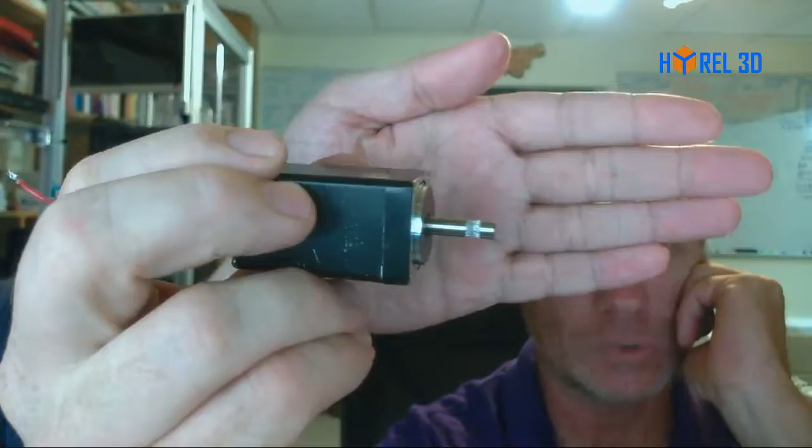Have a motor with a hob on the shaft. And if something like that actually existed, I would be so happy, because that's what that has. And we learned the secret of success, and it turns out doing this is a very simple operation in the machine shop. That will also be tested tomorrow, because that gives me 4 times the resolution and 4 times the torque, which means I can do it on the small motor, which lightens the mass. It cuts the weight of our printhead almost in half.

All right, enough about the ABS head. I think you see that we're getting great progress there, and that I like it. Yes, I like it. It's quite imminent.

Since Daniel is here - hey Dad. Hey Chris, hey viewing world. Today's his birthday, so he's over at Granny's house having a good time.

So what we'd like to do is show you guys a super system with a scanner installed on it, and maybe do a little tiny preliminary demo. So first, would you be kind enough to run the camera, and I'll walk them through what the system has on it? With pleasure.

Oh, you know what? I didn't put the cover back on here. Well, shame on me. Put that out there. Okay, for you guys who don't know what the super system is, it's basically the same thing as the engine, or the system. The engine is just everything that's not enclosed. The system is the enclosed version of it, along with a couple different areas for us for scanning.

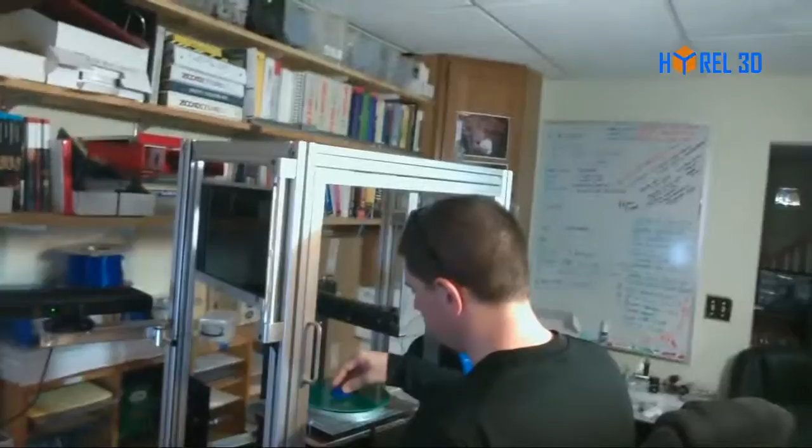Alright, that looks a little bit more like the super system. However, it is still lacking one little detail.

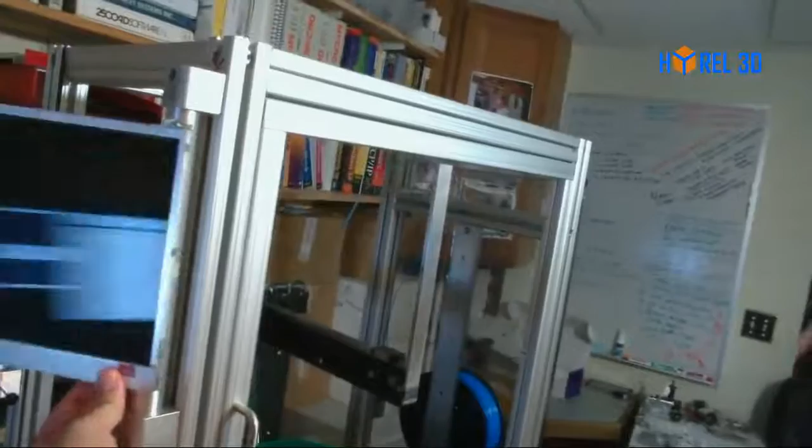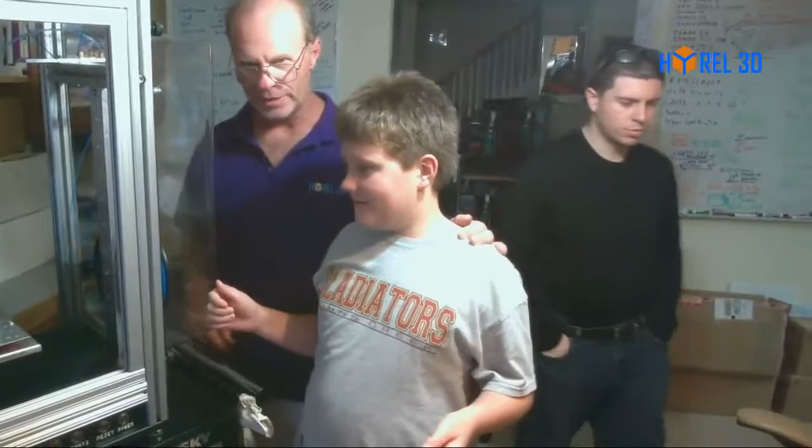Did you have fun over Grandma's? Yep. Good. And hey, one more thing, it's my birthday today. How old are you? 10. Is there any - can you guys believe this guy's 10? Hey, is there any button pushing I can do? No, but you know what, we might need a subject matter. Can you sit really still for a few minutes? Tell you what, he'll be our stunt double tonight. Hang tight, about 2 minutes.

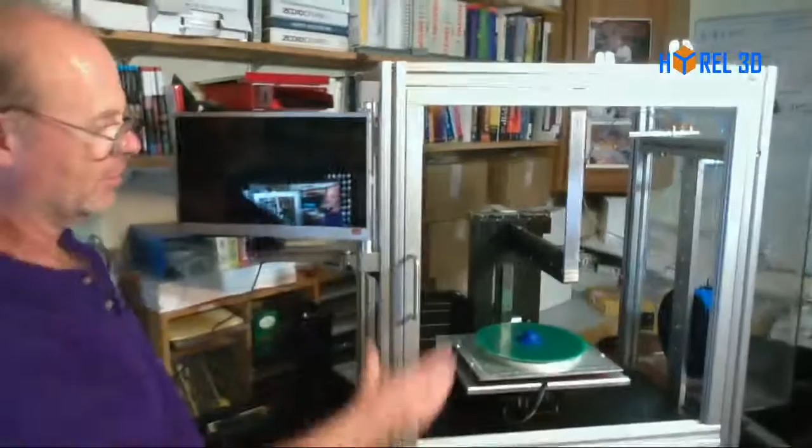So let's just walk through its features. It's 30 inches tall, that's a super system. I hope you have room for it. If you don't, maybe you need a refund. Comes with a single opening door.

Power USA says his son just turned 10 today as well. Well, awesome, okay, happy birthday.

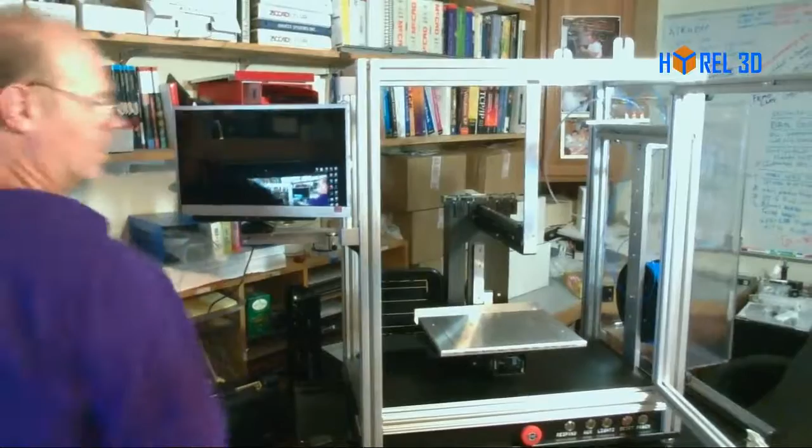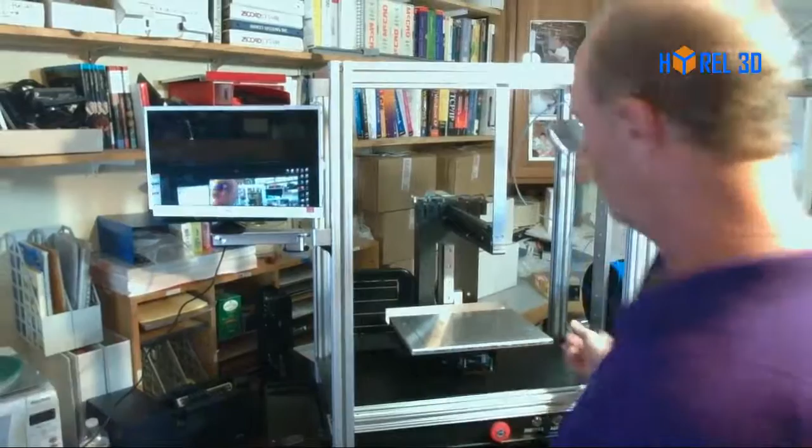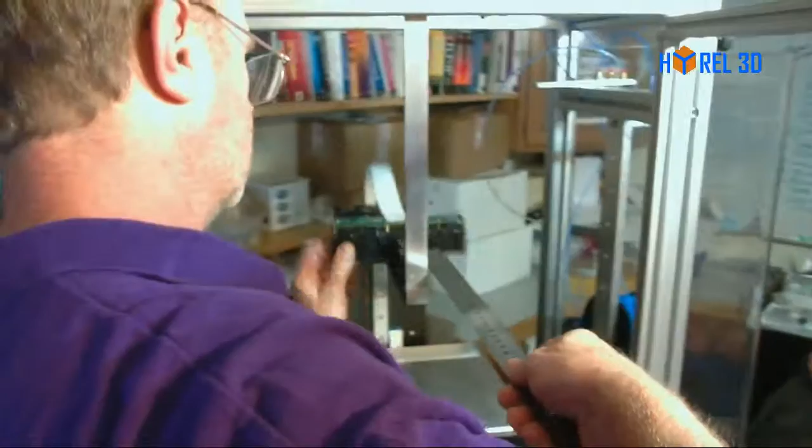Alright, what is standard on a super system? You got the 30 inch height. You got the table, it's the same 200 millimeters up and down. It's a little bit longer than the engine on travel. Approximately - I got to get a ruler to check it out, but I'll tell you in a second. 295 millimeters of X travel. Okay, and the Y travel - oh, that's with the second head. Yeah, that's right.

230 millimeters of Y travel. And for those of you that aren't doing metric so well, that's 9 plus inches of travel in the Y. Okay, it comes with - it comes with an integrated fume scrubber, which is just a small guy, and so some of you are going to want to invest in a better one, but we're actually framing this in. It fits quite well, we'll print up a little mechanism that's a picture frame for it, and so it's got an activated charcoal filter.

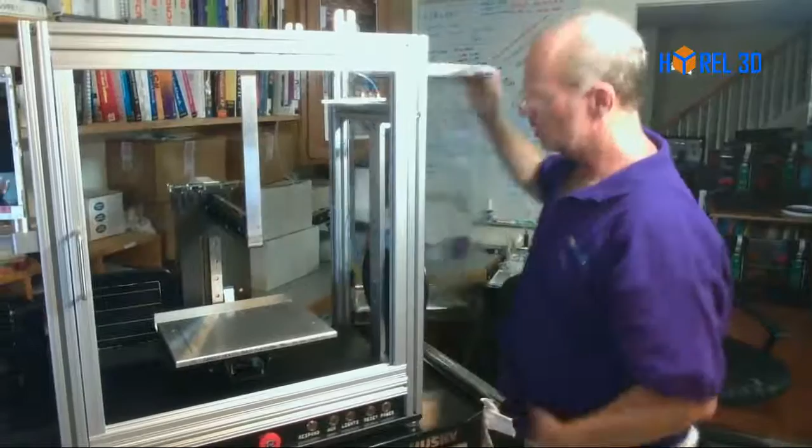All right, it also comes with, and this is standard on the Super System - you don't have to have this again - a side-mounted material holder. So that's standard on Super System. The top is optional, it's not going to normally be included on this for the Super System.

And it comes with a 14-inch display, which we are trying desperately to make into a touchscreen as we speak. And then it has this nice swing arm scanner built into it, which, if you swing it in here... well, let me get the cord so I can move it around for you.

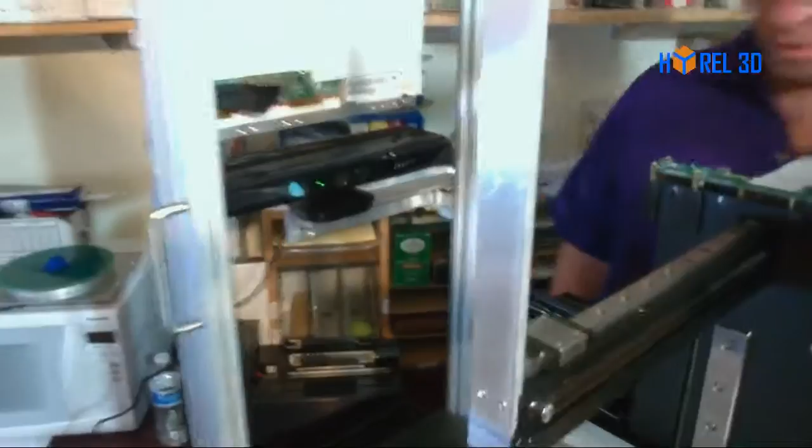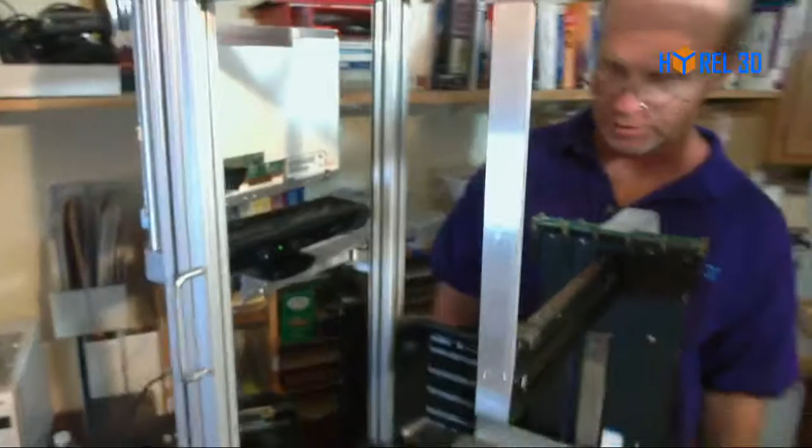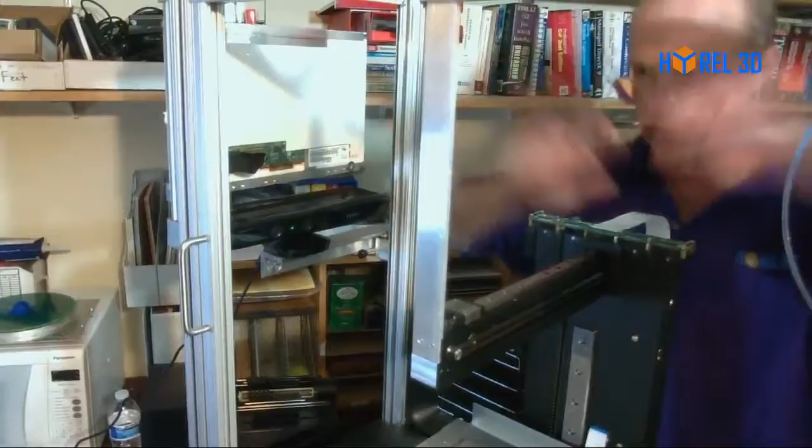If you notice, it says Kinect. Let me tell you a little story. There's a company called PrimeSense, located in Israel. They developed this 3D dual camera infrared technology, and Microsoft got their hands on it around 2009. Then in 2010 they said, let's make this into the Kinect, where people can go out and do their dancing, and it tracks everything. Then they said, no one's using this technology, let's drop an SDK, a software development kit, which they did.

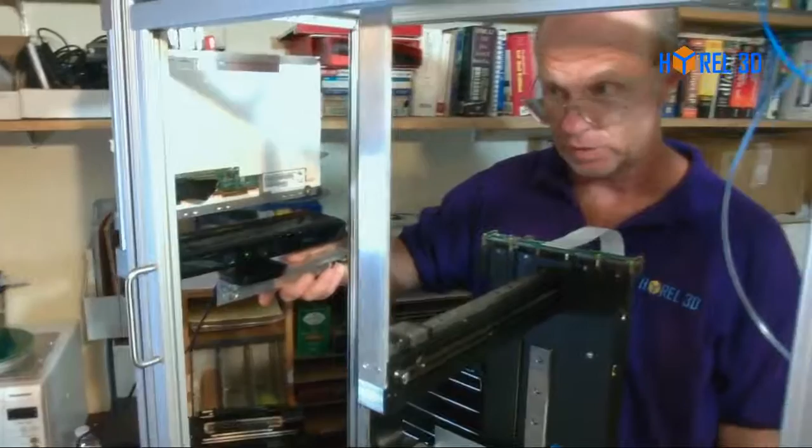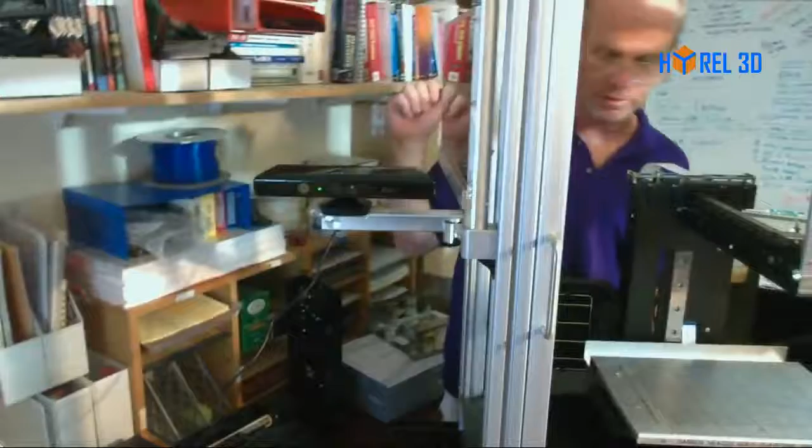And now lots of people are developing third-party software for it. We tried lots of third-party software the last two weeks, trust me, and one of them actually works, which we're going to demonstrate in just a minute. But the reason why this is on a swing arm is so that you can move it out and do something outside, like scan a person. Although we're finding out that you're actually better off moving the Kinect than moving the person, so far. We're still working on that.

Oh, I didn't show the good part. Where is it? Oh, there it is. If you want to scan, of course the glass will be in here, so you have to open the door — and it's not glass, it's plastic. You put your rotary table on here and plug it into the little connector underneath. I can't see whether that's the right side... yes, it is. Okay, and now that is powered by the computer. All right, and yeah, it rotates and lights up.

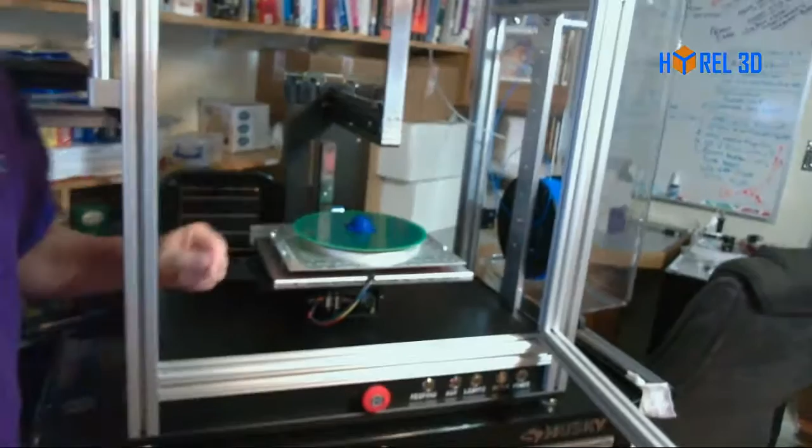I'll give you a demo on that once we get the PrimeSense connector. This is the Microsoft Kinect for Windows, and it's a good place to start, but it's not as good as the sensor we have coming. That sensor works at shorter working distances, which means you're going to get higher resolution scans on objects that are printable.

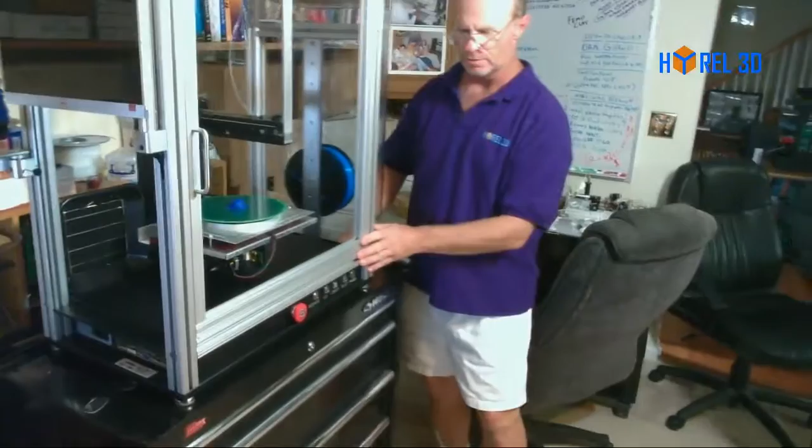Okay, without further ado, now we can move over and let the two smartest guys in the family prepare to do a scan for you guys, and hopefully we can do a screen share while it's happening.

Yes, we can. Christopher, you have to sit in your chair. Give me one second, guys, we'll get the camera set up. Just a moment — Daniel's probably going to move the camera while you hold really still, okay? Where would you like him to sit? Right here? Yeah, from right there. Oh, sorry, it's fine, it's fine, I'll move out of the way. Let me just go get this guy, get the cable up and around. There you go, now come around to that side. Run the camera. And, this might shock you, but don't jump, okay? Boy, is he tough?

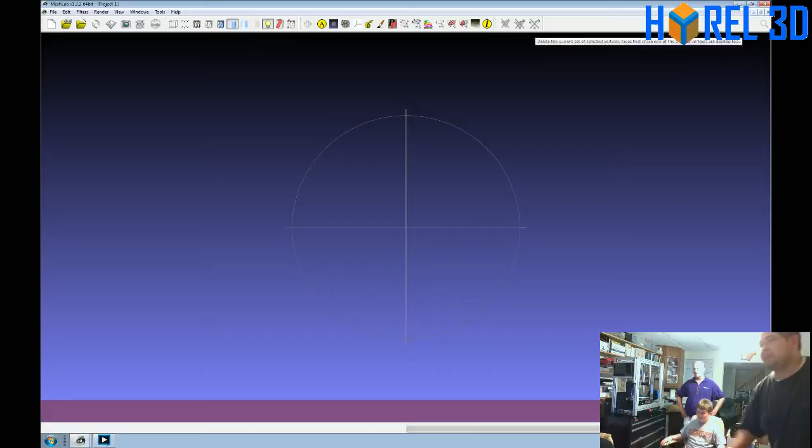Okay, so how do I do the screen share? Go ahead and move this guy, move this window all the way over — that side, there you go. Okay, now come over to... let's move this over here too, just so. That's fine. Okay, now click screen one capture. Screen one capture. Okay, now come down here and you'll see — got it. MeshLab's already up. Sorry about that, okay, right there. I'm opening up the program right now, and just so you guys know, we're using a Microsoft... Kinect software is actually already up too. Oh yeah, I apologize, I guess.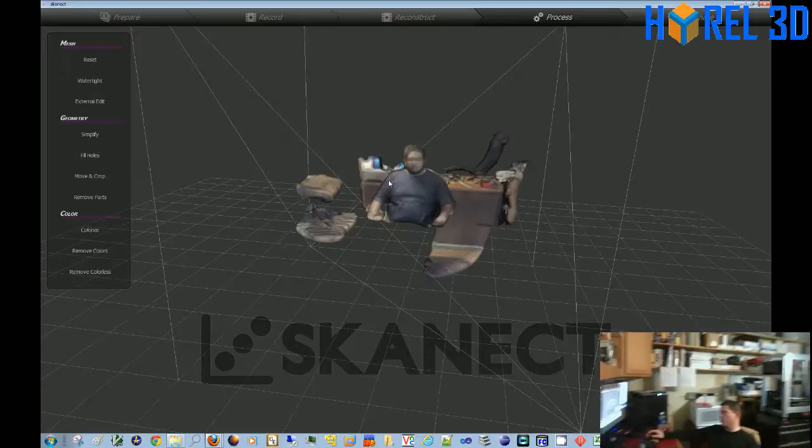Okay, so this is a 3D landscape that we generated using this Skanect software of — well, I'm the other Dan, so we call him Hutch around here, but you guys always call him Dan. And as you can see, we have the desk in the background. I'm going to end the full screen — do I go full screen camera? You can go full screen camera, yeah, that just goes back to that. So, can I see the camera for a second? Sure, so this shows you guys — you guys just saw that, and here we have the same.

So you can see here's the desk, and there's a chair. There was a chair over there as well. So now you guys know what it is we're looking at. Go back to the screen on capture, now you can see that here. So now you can see the entire environment. Yes, and there's that portion over there, and that portion has since been moved, so unfortunately I can't check that.

So what we're gonna do now is we're gonna scan Chris, and we're gonna go over here, and we're gonna do a half room. You can calibrate all these settings. We're in the process of determining what the best settings would be for the scan.

Wait, should I close my eyes or open them? Open, yeah, keep them open. Natural. You wanna come over here. Yeah, just scoot up just a little bit, so you're in the field of view. Okay, look into the camera. Now when he walks around with the camera, you can just keep looking at the same place.

You think it's getting driven by the other camera driver? We can unplug the other camera, right? We can actually unplug this camera for the moment. The only thing is that people wouldn't, everyone wouldn't see where we are.

Oh, we're fine, woohoo! Alright, so that, oh, I didn't do that. I couldn't figure out what it is. An instance is still kind of running somewhere. Oh, it didn't shut down, it didn't shut down properly. We're going to have a lot of fun with the little task sniffer. Make sure everybody shuts down properly. Good thing I know how to do that.

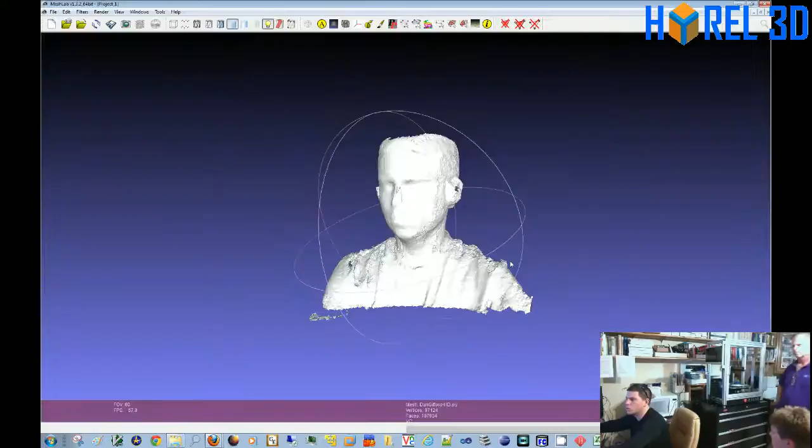What we'll do is maybe we'll attach some videos to the site, and you guys can download the videos of us actually scanning things. But here, I'll give you another one here. So we have one from Mesh Lab here. So this is actually me, let's get me up here. So this is me, and I scan myself over here. It's not perfect, but it's definitely moving in the right direction because we're still perfecting the process itself, and that's kind of where we're going from.

So I have a question here. It says the Kinect resolution isn't very high, scanning a person is okay, but very small parts with details? The answer is that actually does matter, and we're in the process of perfecting how we can scan the smaller parts. A lot of that has to do with the thermal imaging, because there's actually a thermal camera as well on there, and that makes a large difference. Since the part is above room temperature, it's able to detect that and figure it out. So that does matter.

Yeah, how about we scan you tomorrow? Sorry, there's only... is that one okay? I can do. All right, let's see here. All right, thank you, sorry Chris. Other, good job, all right.

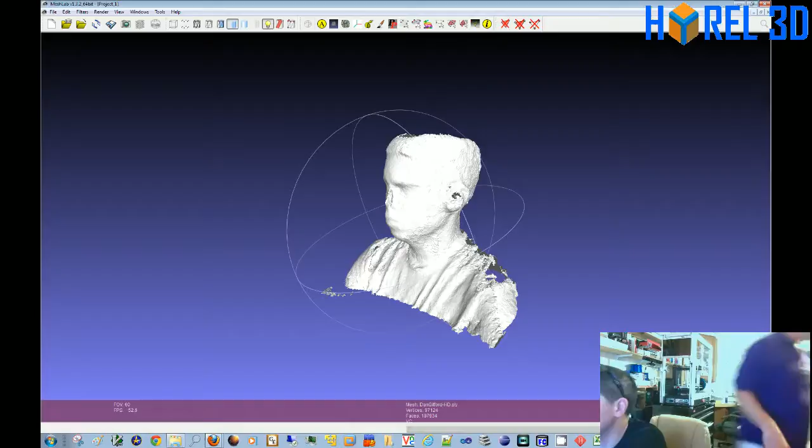And I got a question here from Eagle Wange, and it says, did we move from lasers to Kinect? The answer is yes, and we've been getting much better results with the Kinect overall. We had troubles getting the lasers to be consistent. No, that's not necessarily true. Really? Yeah, okay, my bad. I apologize, let me address that one. Oh, I'm sorry, but yeah, at the moment we're leaning towards the Kinect.

Yeah, yeah, I'll just, you can have a chair. Thank you very much, all right. Thank you, Dan, yes, appreciate it sir.

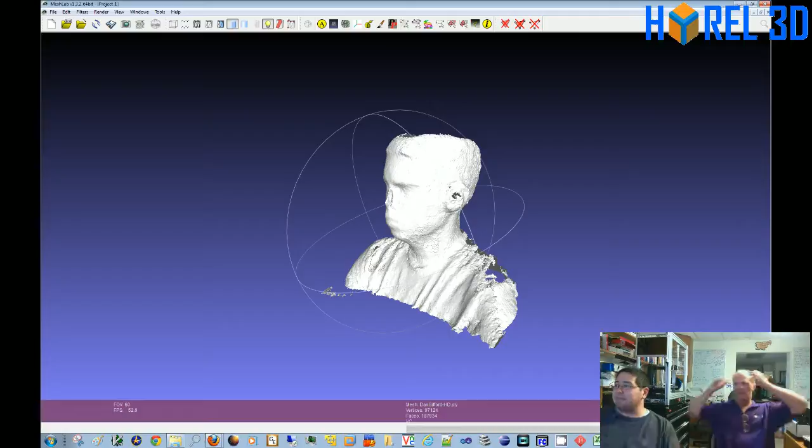And yeah, I guess we'll have those videos up as soon as possible. We'll have to figure out why I can't run with two different cameras, but that's a driver issue. This is something that's plagued us all week, is that the sensors themselves, the drivers, are not very robust. And I think I was talking with Daniel G.

We've been here an hour, and we've tried over half a dozen different software packages, and only one worked. You find all these blogs online saying, oh, this one, oh, that one, and then you end up saying nope, doesn't work with Windows 8, nope, doesn't work with Windows XP. We went around and around until finally we found one that actually does work, if it's the only camera that's active. We'll figure out how to give a better demo for that with the broadcast camera obviously live.

The question about the laser, I don't want anyone to be confused. This scanner is a low-end scanner. The Super System comes with one of these, and it comes with the laser scanners as well. But as you know, we're working day and night to get these guys out the door, and I cannot take too much time to push the laser scanners forward. And the laser scanner gives a point cloud.

Since my son has been available to help us, and he'll be available for maybe another month we're hoping, we're taking advantage of the low-hanging fruit. Since we had to go to Mesh Lab anyway, and we saw this video, which a couple of people had brought to our attention - yes, thank you, Kevin, thank you, Ken, thank you everyone.